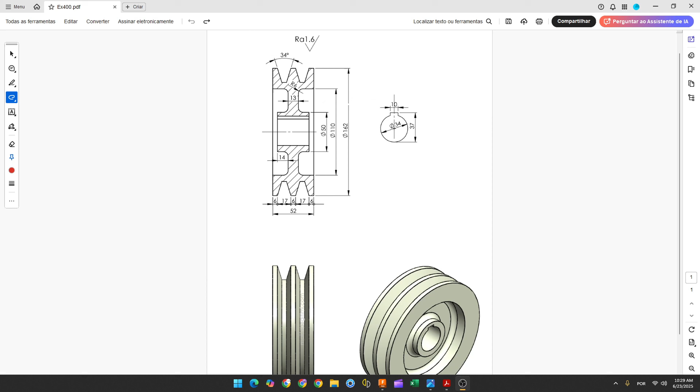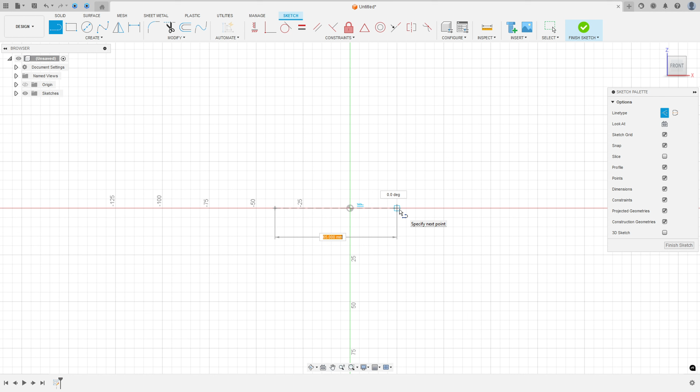The first step to create this pulley in Fusion is to consider the midpoint and make a construction line here with 52 millimeters of length, and another construction line in the center with 162 over 2 millimeters, which is 81 millimeters of length. Open Fusion, go to create a sketch, select the front plane, select line, construction line, make a line here with 52 millimeters of length, go to constraint, select the midpoint, make sure this line is in the center. Select a line again, make a line here with 162 over 2 millimeters, 81 millimeters of length.

Now we'll create this line and this one, using the mirror, so let's create only this line here. The length of this line, the distance between this line and the construction line, will be 6.5 plus 14.

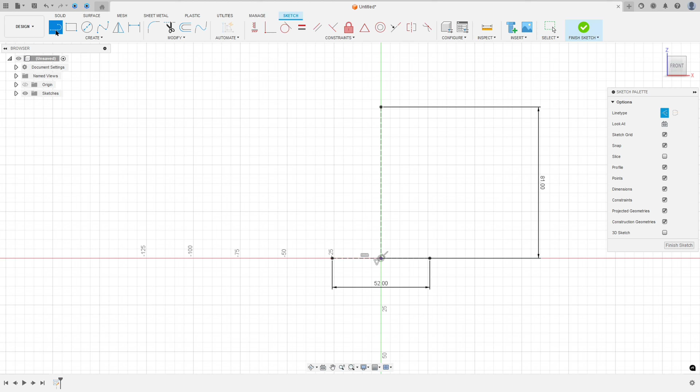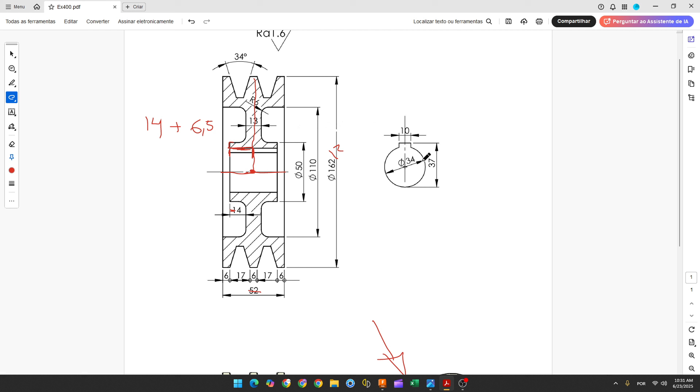Select line, remove the construction line type, click here. The distance here is 6.5 plus 14, and create another line here. We'll put the dimensions here. The distance between this line and the midpoint is the radius of this diameter. The diameter here is 34 millimeters, so the radius is 17 millimeters.

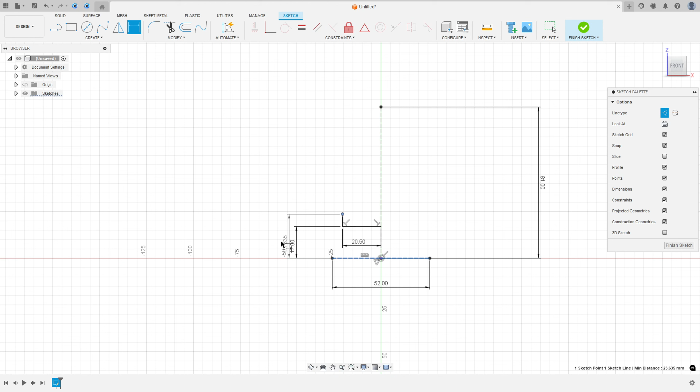Go to sketch dimension, the distance here 17 millimeters of radius, and the distance between this point and the midpoint is 25 millimeters, the radius of this diameter. So the distance here is 25 millimeters.

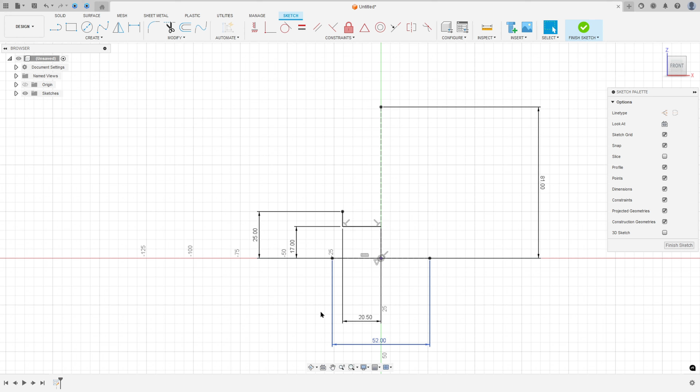Now let's create this line here, this one and this one. This point here is vertical with this point here, and the distance between this line and the midpoint is 13 over 2, 6.5. Select a line, make a line here, make another line here, go to constraint, select horizontal vertical, select this point and this point here, go to sketch dimension, the distance between these two lines is 13 over 2.

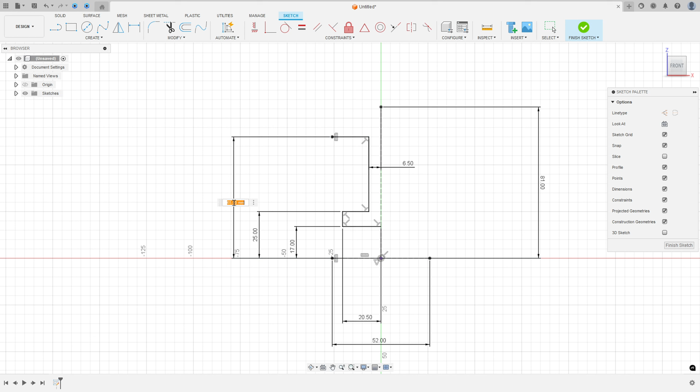The distance between this point and this line is 110 over 2. So the distance here is 110 over 2. We have a radius here with 6 millimeters of radius, so let's create this. Go to modify, select the fillet. The fillet here is 6 millimeters on these 2 edges. Press OK.

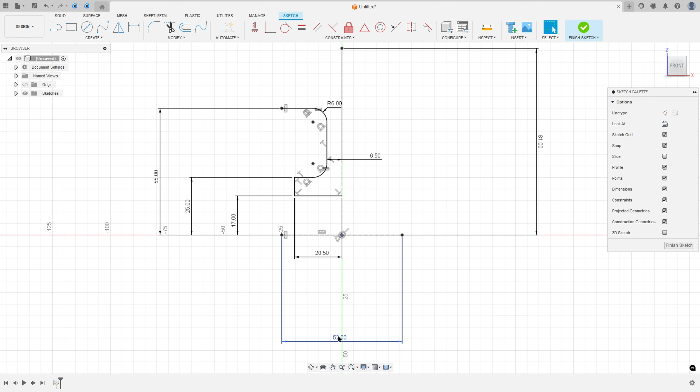We made this. Let me move the dimensions here. Now we need to create a line here, and this point is coincident with this point here. Let's create this line and make this sketch here. We'll put the dimensions later. Select the line, click at this point, make this sketch here.

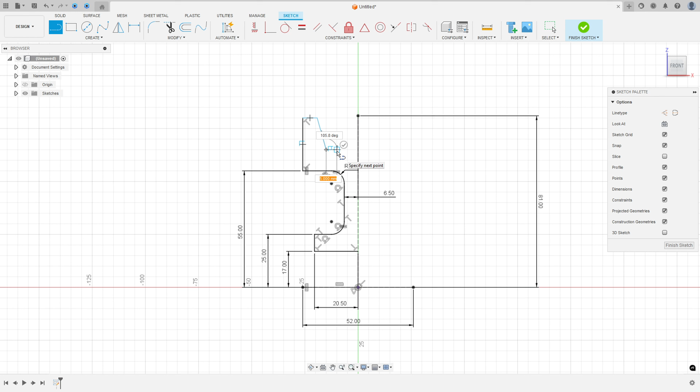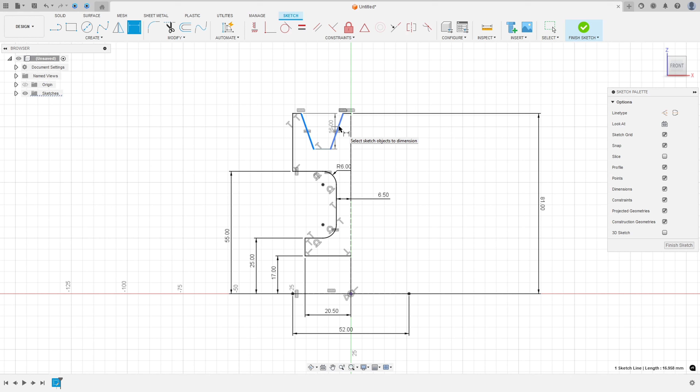Go to constraint, select horizontal vertical, select these 2 points and select this point and this point here. Now go to constraints and select the equal, select these 2 lines here, and let's see the dimensions. We know that the angle between these 2 lines is 34 degrees. Go to sketch dimension, the angle here is 34 degrees.

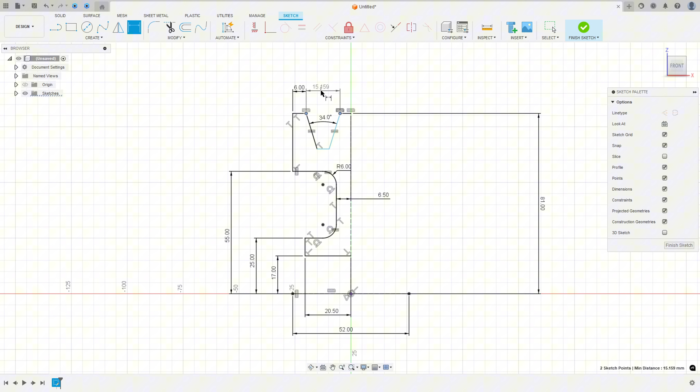The distance here is 6 millimeters, and the distance between these 2 points is 17 millimeters. So here we have 6 millimeters, and the distance between these 2 points, 17 millimeters. Here we have a line in the center. The distance here will be half of 6, so it will be 3 millimeters. Let's check this, 3 millimeters, okay.

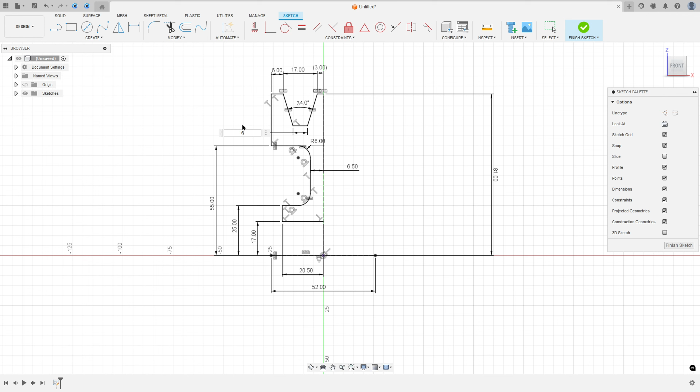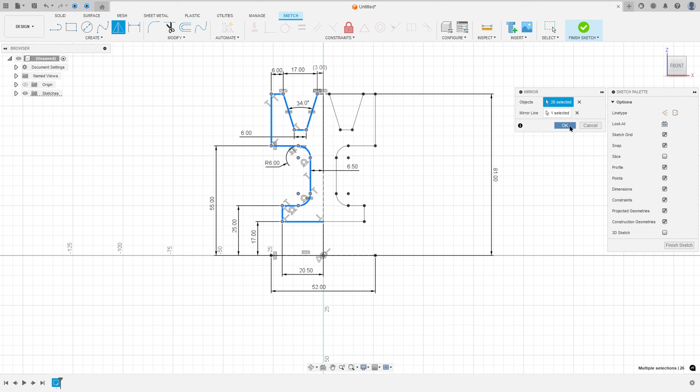And the length of this line is the same as this one, it's 6 millimeters. We made this. Now select all this line here and go to mirror. The mirror line is this construction line here. Let me select one more line, sorry. Press OK. We made this profile here.

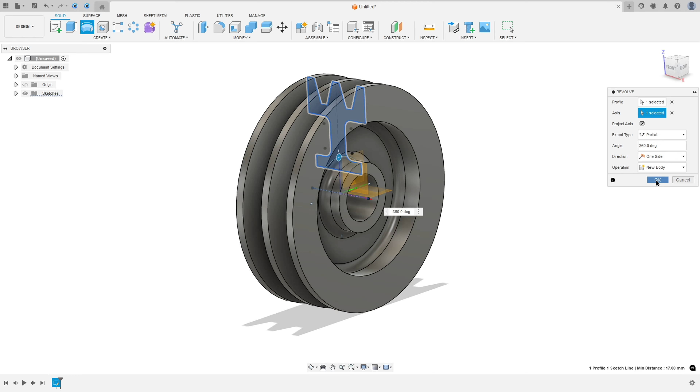Let me see, it's missing this line here, sorry. So finish the sketch. Go to Revolve Features. The profile is this profile and the axis is this construction line. So we made this. The angle 360 degrees, operation new body, press OK. We made this.

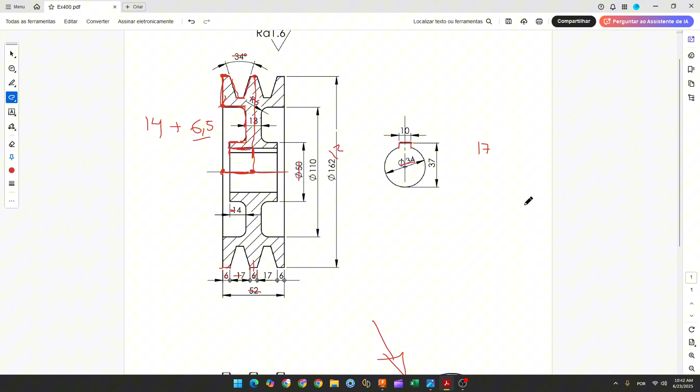Now we need to create this cut here. To create this, go to create a sketch, select this face here, select the project include, select this face, press OK. Now select the 2-point rectangle, make a rectangle here, and go to constraints and select the tangent, select this line here and this edge here. We make a rectangle here between this edge and this line to this one here.

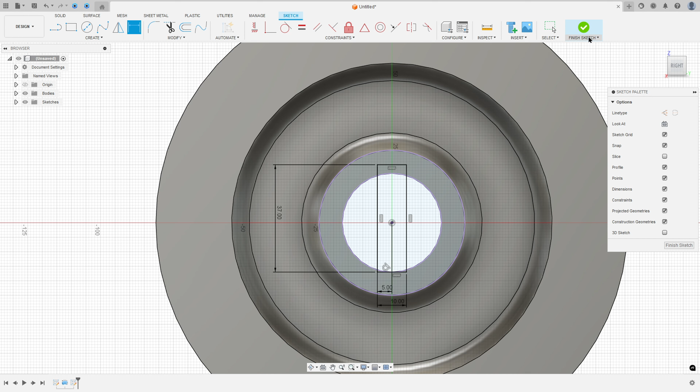So the dimensions here are 10 millimeters and 37. Go to sketch dimension, the distance here 10 millimeters and here 37, and the distance between this line and this is 5 millimeters. So put this rectangle in the center and finish the sketch. We have this profile here. Go to extrude, the extent type select all, operation cut, we'll make a cut to this side, and press OK. We made this.

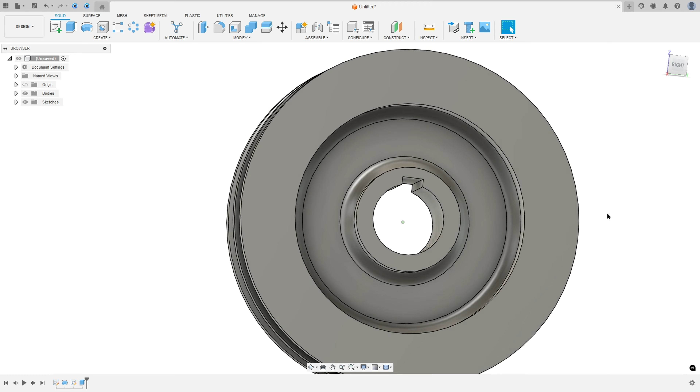So here we finish our exercise.